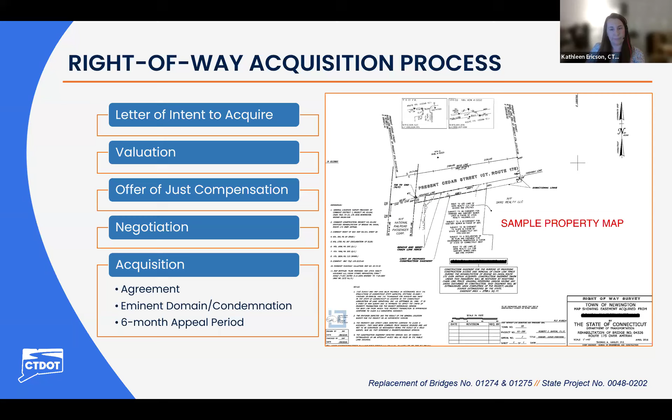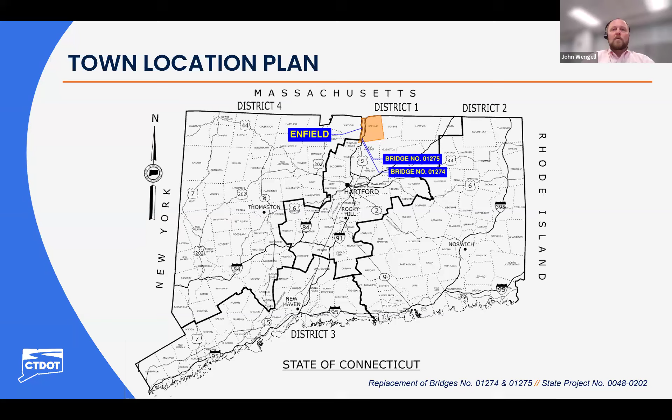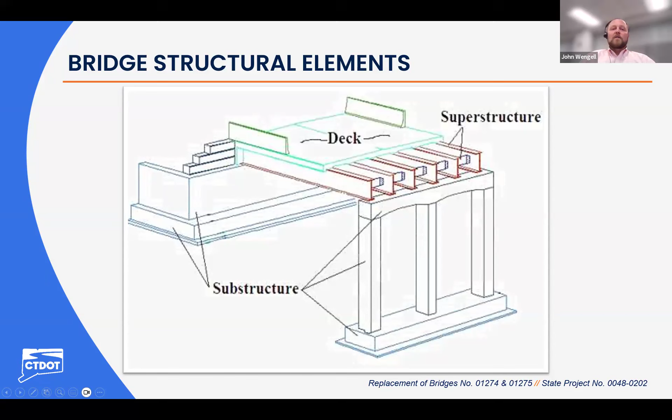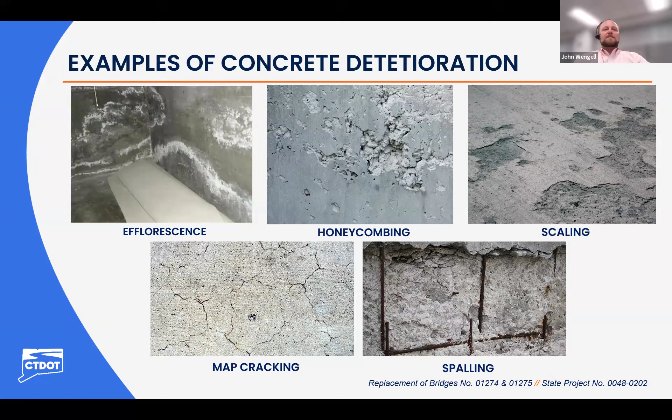Now I'd like to introduce Mr. Donald Costello from Jacobs Engineering to present the technical portion of this project. Mr. Costello? Thank you, John.

We're looking at bridge number 1274 in the aerial plan view and elevation view. Next slide, please.

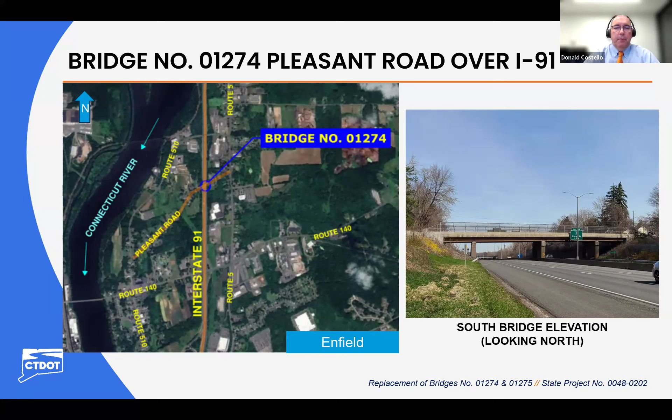Just going to go over the project purpose and need. The purpose of this project is to address structural deficiencies of the bridge supporting Pleasant Road over I-91. The needs of the project include improving the load rating factor to achieve a minimum of a 1.0 for all legal loads, eliminate the National Bridge Inventory condition rating of 4, eliminate the appraisal rating of 3 for a deficient vertical underclearance, and generally improve the condition of the structure to assure a long service life.

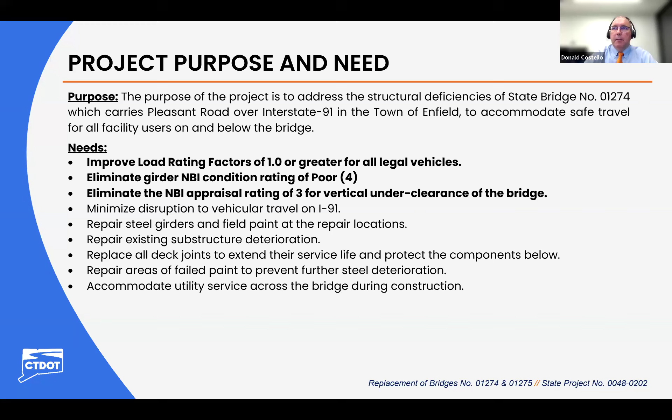Next slide, please. Project need is to raise the bridge to an NBI rating of at least a satisfactory of a 6. So what is a condition rating? It's a judgment of a bridge component's condition in comparison to its original as-built condition. We use these ratings to provide an overall characterization of the condition of the bridge component being rated.

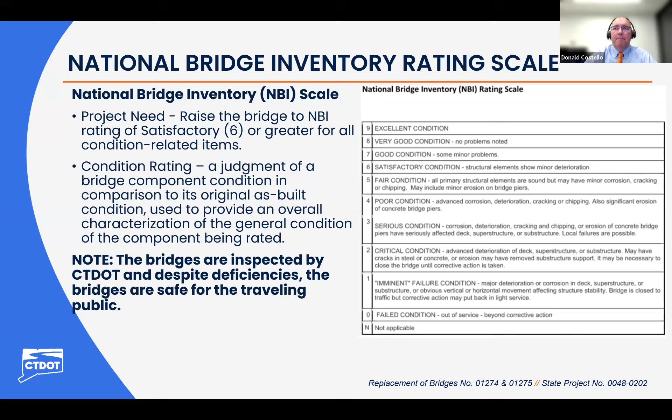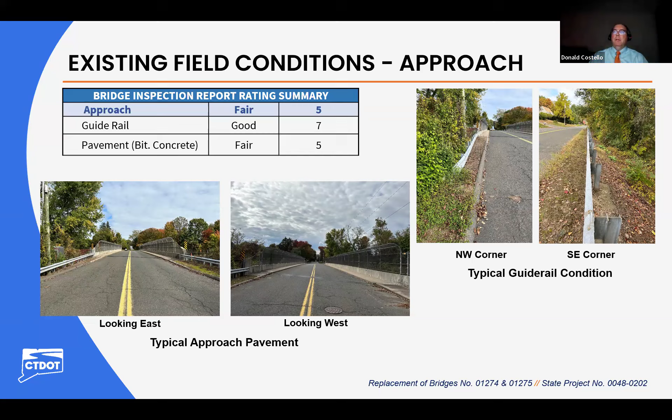Next slide. A little bit about the existing field conditions. We're looking at photos of the approach roadway conditions. As you can see, the rated items include guide railing and pavement, with condition ratings here ranging from fair to good. Next slide.

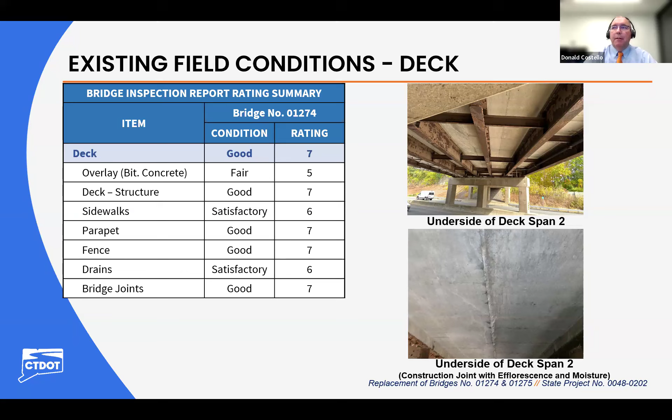Here we have the existing conditions of the deck, some typical photos. The bridge was built in 1959. That puts it at 66 years old, roughly, and had its last major reconstruction in 1995. So this slide is showing photos of the typical condition of the bridge deck and a summary of condition ratings related to the deck, which range from fair to good.

Here we have the existing conditions of the superstructure, showing photos typical of the steel girders supporting the concrete deck, and a summary of condition ratings related to the girders and bearing, which range from poor to good.

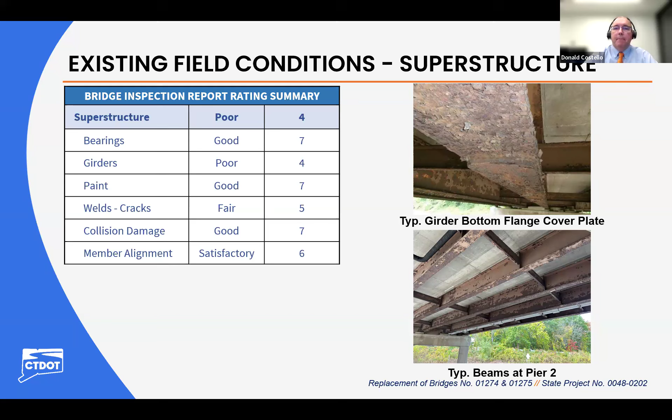Next slide. Here we're looking at typical photos of the existing bridge substructure, which includes the supporting concrete abutments and the supporting concrete piers. There is also a summary of condition ratings for these components, which range from fair to good condition.

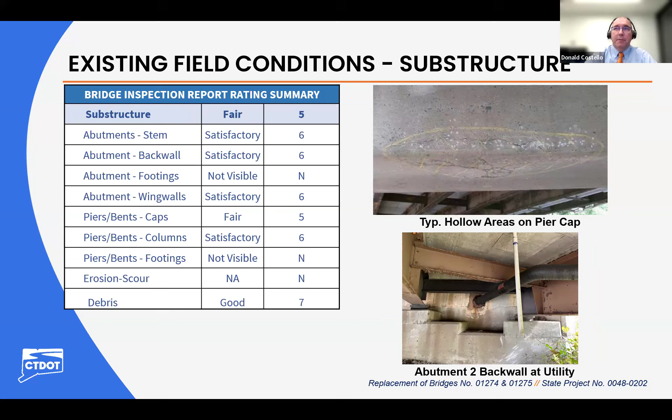Next, we have our proposed bridge reconstruction, which is a proposed full bridge replacement. We're going to replace it with new concrete bridge abutments and piers supported on pile foundations, new steel girder superstructure with a concrete deck.

On the approaches to the bridge, we will install new MASH compliant approach guide railing, and the roadways will be reconstructed with new full depth pavement to accommodate a slight raise of the roadway profile. The reconstruction and raising the profile will allow the new design to achieve standard vertical clearance for an interstate roadway of 16 feet 3 inches. The new bridge will be designed to achieve a service life of 75 years.

This is our proposed roadway reconstruction plan for the project. Let me describe our color scheme: pavement reconstruction is yellow, filled side slopes are shown in green, the bridge and barrier elements are shown in orange, and the right-of-way lines are shown in red. The roadway will be reconstructed approximately 300 feet west of the bridge and extend approximately 250 feet east of the bridge.

The side slopes will be filled slightly to accommodate raising the road profile for increasing the vertical clearance. Some of this filled embankment will extend beyond the available right-of-way, as illustrated by the green area that extends beyond the red lines. Reconstruction of I-91 below the bridge will be limited to the left and right shoulders adjacent to the bridge. Next slide.

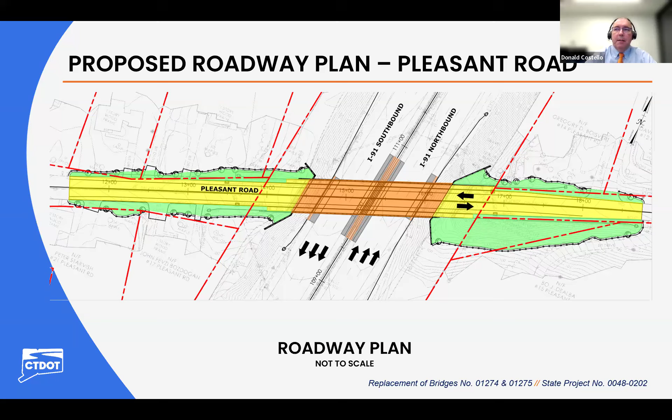The span arrangement has been established to allow for future widening of I-91 should that need arise in the future. Next slide.

Another item to note is that the traffic signs and VMS signboard, or the variable message signboard, that are mounted to the southbound fascia will all be moved off the new bridge and onto new supporting structures. Next slide, please.

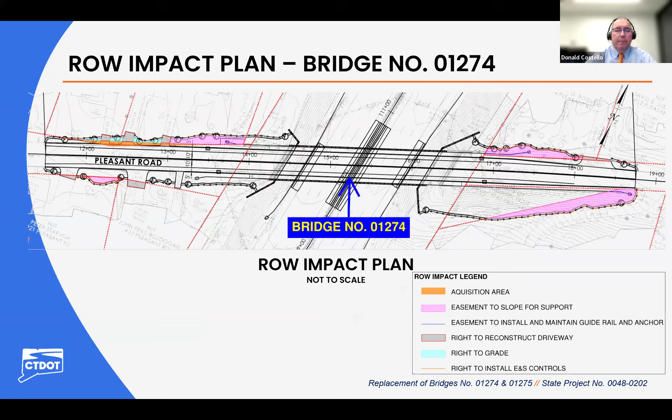This plan shows the impacted area of adjacent private properties. The right-of-way process was described at the start of the presentation, and affected property owners will be contacted by the department as the design develops. Next slide, please.

Now we'll move on to bridge number 01275, which is Route 510 over I-91, also known as Depot Hill Road.

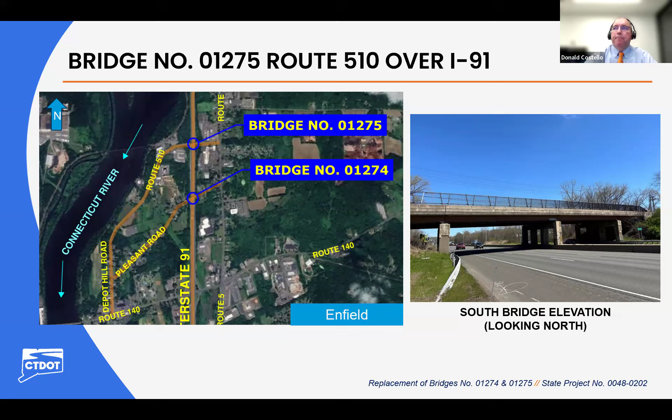Purpose and need of this project. The purpose of the project is, again, to address structural deficiencies of the bridge and to accommodate safe travel for all facility users on and below the bridge.

The need for the project arises from the general condition of the structure, which is in fair condition, but could easily be downgraded to poor condition as soon as the next inspection due to the condition of the steel girders. There's a need to increase the vertical underclearance and generally improve the condition of the structure to prevent future deterioration and maintain a safe structure for the future. Next slide, please.

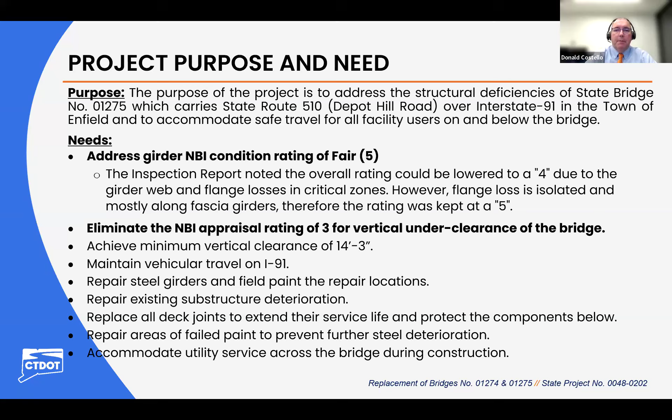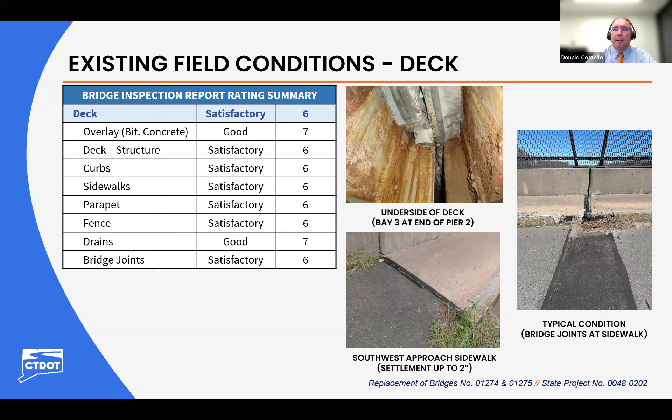Next slide. This is the bridge deck. This bridge was also built in 1959 and last reconstructed in 1990. This slide is showing photos of typical condition of the bridge deck and summary condition ratings related to the deck, which range from satisfactory to good.

Next slide. This slide is showing photos of the typical condition of the steel girders supporting the concrete deck and summary of condition ratings that are related to the girders and bearings, which range from fair to satisfactory.

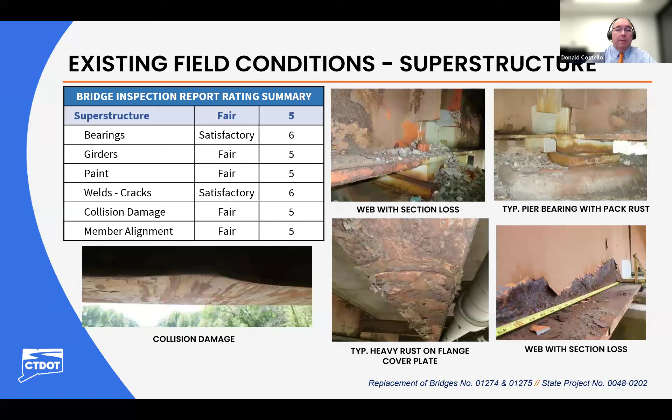This slide is showing typical photos of the bridge substructure, including the concrete abutments and the concrete piers. There's also a summary of condition ratings for these components, which range from fair to good condition.

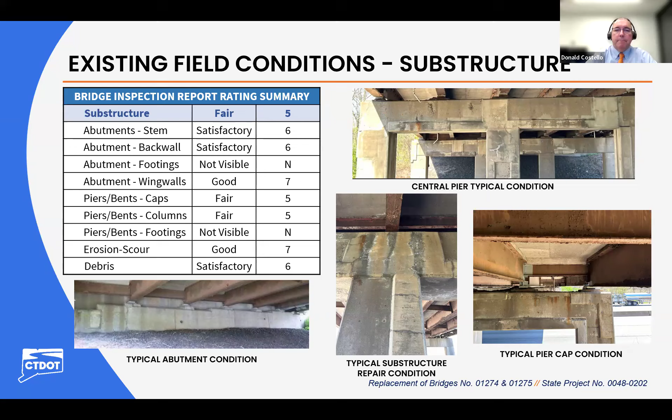For this project, we are proposing to reconstruct this bridge with a complete replacement, including new concrete bridge abutments and pier supported on spread footing foundations and a new steel girder superstructure with a concrete deck. On the approaches to the bridge, we'll install new MASH compliant approach guide railing, and the roadways will be reconstructed with a new full depth pavement to accommodate a slight raise of the roadway profile.

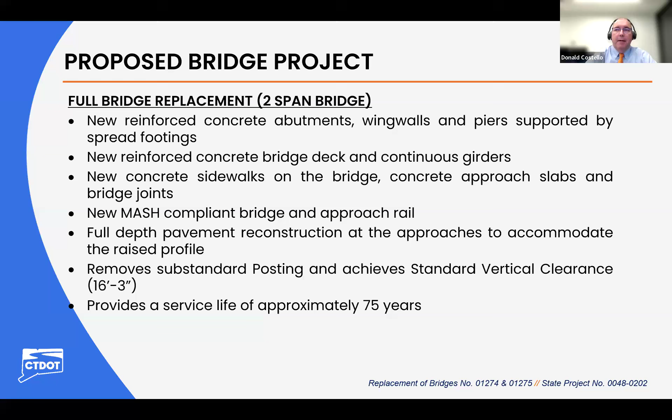The reconstruction and raising the profile will allow the new design to achieve the standard vertical clearance for an interstate roadway of 16 feet 3 inches. And again, the new bridge will be designed to achieve a service life of 75 years. Next slide.

This is our proposed roadway reconstruction plan. Once again, the color scheme includes pavement reconstruction in yellow, filled side slopes are green, bridge and barrier elements are shown in orange, and right-of-way lines are shown in red.

The roadway will be reconstructed for approximately 375 feet to the west of the bridge and extend approximately 275 feet to the east. The side slopes will be filled slightly to accommodate raising the roadway profile for increasing vertical clearance. For this bridge, the filled embankment will stay within the available right-of-way, as illustrated by the green area between the red lines. Reconstruction of I-91 below the bridge will be limited to the left and right shoulders adjacent to the bridge.

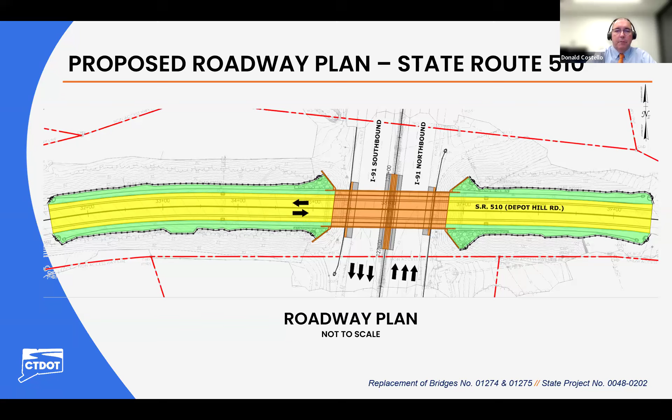This is a zoomed in view of the bridge reconstruction. Again, color here depicts bridge and retaining walls in orange, the roadway reconstruction in yellow. The existing bridge is a 4-span structure with short end spans and main spans over I-91, supported with 2 abutments and 3 concrete piers. The proposed bridge is a 2-span structure supported by 2 concrete abutments and 1 concrete pier. Span arrangement has been established to allow for a future widening of I-91 should the need arise.

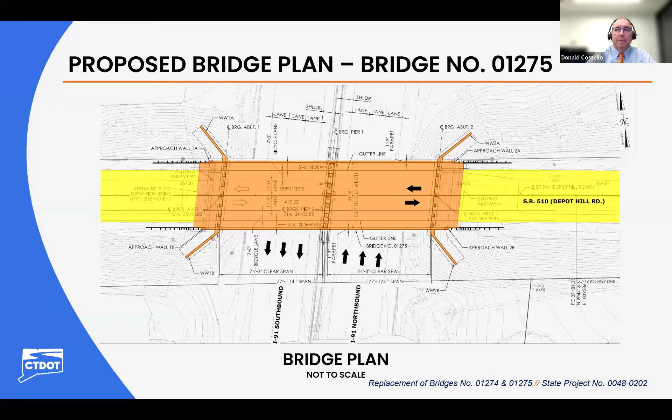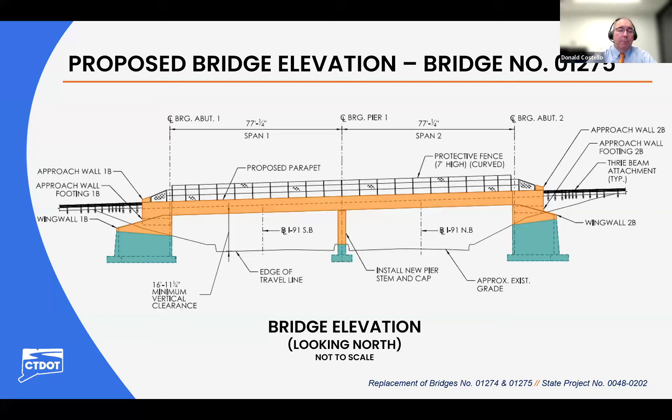Again, we have an elevation view of the proposed bridge. Color scheme here includes the abutments are orange. The blue is the support structure below grade, which will not be visible once the bridge is complete. Note that the minimum vertical clearance occurs at the west end of the bridge at the I-91 southbound shoulder, similar to the previous bridge we looked at.

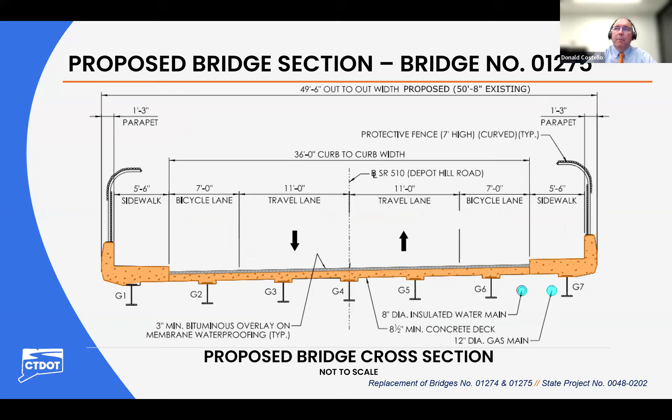This is a cross-section view of the proposed bridge. Note that the overall width is actually 14 inches narrower than the existing bridge. The typical section includes a bicycle lane in each direction, a little bit wider here, and the travel lanes are wider on this bridge compared to Bridge 1274. Again, there's a sidewalk on both sides as there is today.

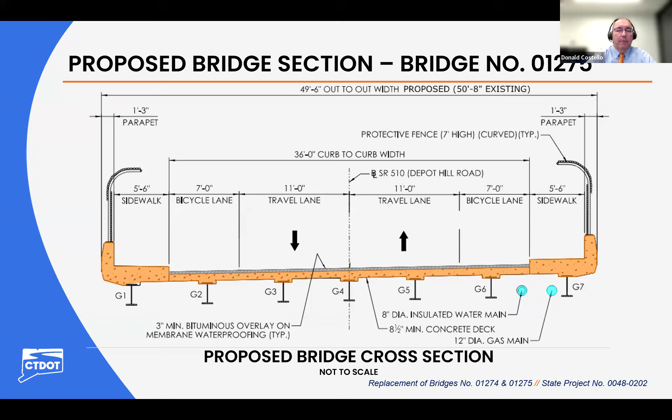No sidewalks will be constructed beyond the bridge. As part of this project, there's currently a plan to include lane striping for the bike lanes along the roadway, extending to where the current width will accommodate the lanes. Then it will be terminated.

There are 2 primary advantages for closing the roads for bridge reconstruction. The first is speed of construction: the contractor can work much faster if he does not need to maintain existing traffic on the bridge, and the work can be completed in a single stage of construction versus building half the bridge then shifting traffic to build the remainder. The second advantage is that this creates a much safer work environment for both motorists and the contractor's crew, since the work is mostly away from moving traffic.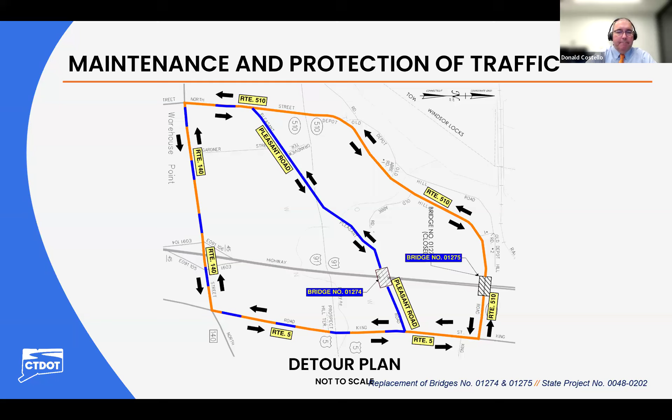Thank you, Don. The anticipated project schedule and construction cost: the anticipated start of construction is spring of 2028, and the end of construction is summer of 2029. The construction cost is $30 million, which is 80% federal funds and 20% state funds. Work will be done at zero cost to the town of Enfield. The project schedule and costs are preliminary and subject to change.

Thank you. Are there any questions that any attendees would like to ask?